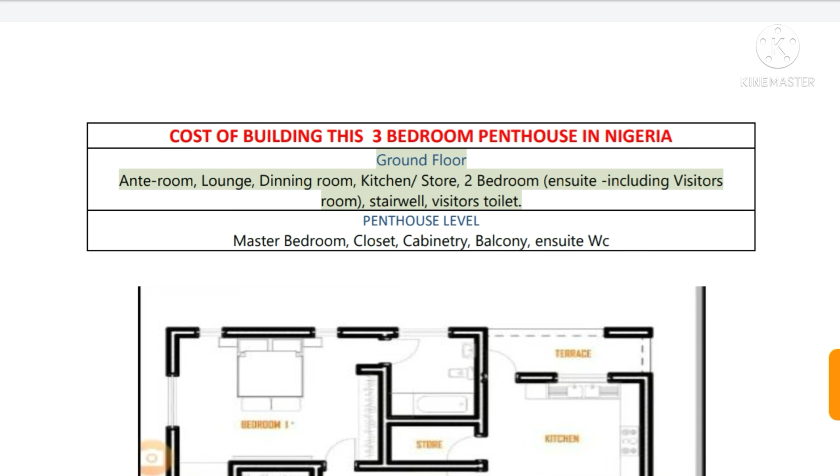As you can see, we have the features for this house, which is in the ground floor area. We have the ante room, the lounge, the dining room, the kitchen and store, a 2-bedroom ensuite room, the stairway, and the visitors toilet.

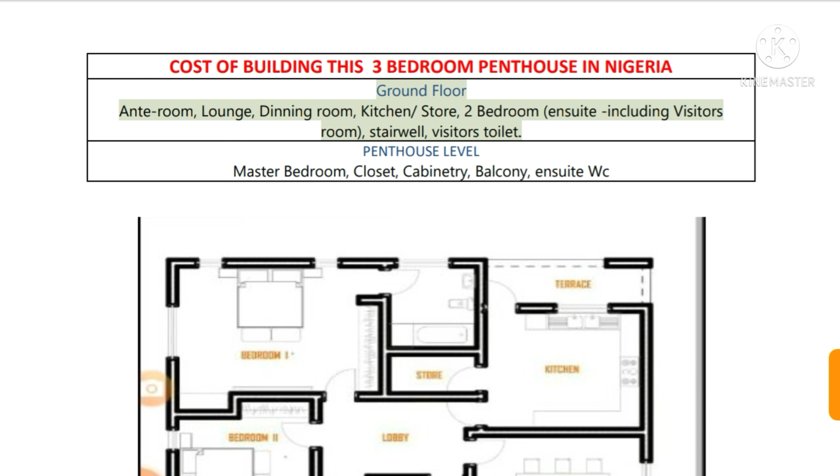We also have, in the penthouse level, the master bedroom, the closet, the cabinetry, the balcony, and the ensuite WC. Here is the building plan for the ground floor level.

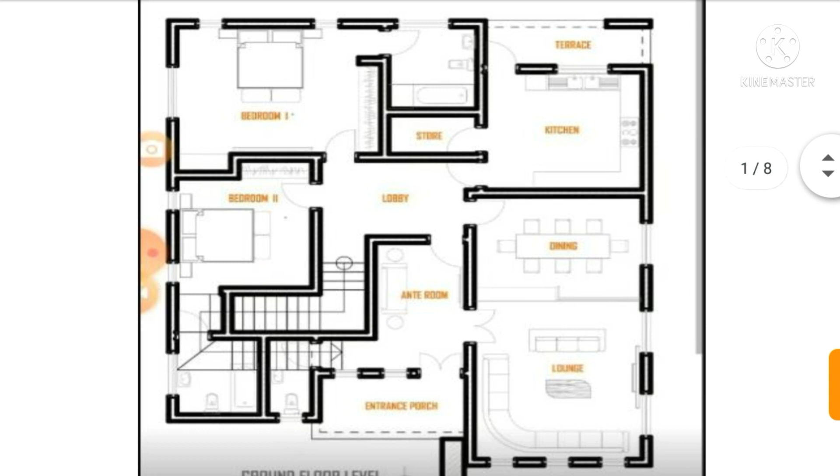As you can see, here is the building plan. I hope you can see it. We have the 2 bedrooms here, a lobby, an ante room, the kitchen, the dining, the lounge, and also the entrance. You can see the staircase here where it takes you to the penthouse level.

So going to the penthouse level, here's the penthouse level where you have the master bedroom, the closet, the toilet, the cabinetry, and also a balcony where you can sit and relax.

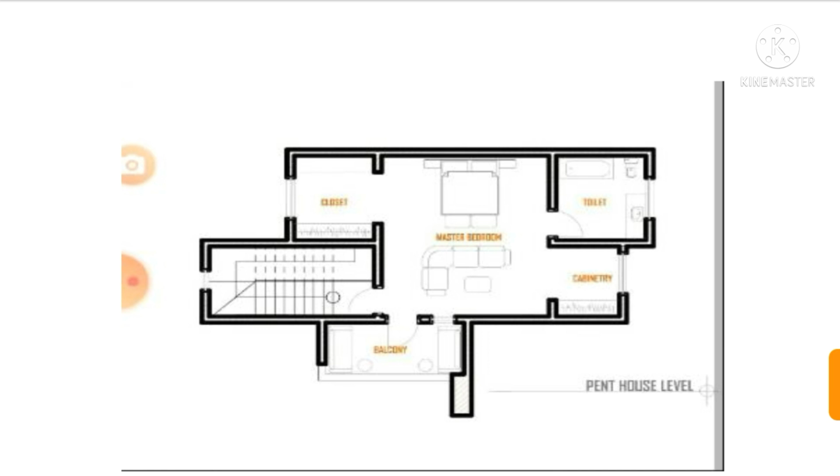So going to the cost of building a penthouse in 2022 in Nigeria, let's get started so we know the cost of materials. I'd like you to watch this video to the end so you find out the materials, because most of the prices have gone up and some prices may have been slashed, so you want to find out as we get started.

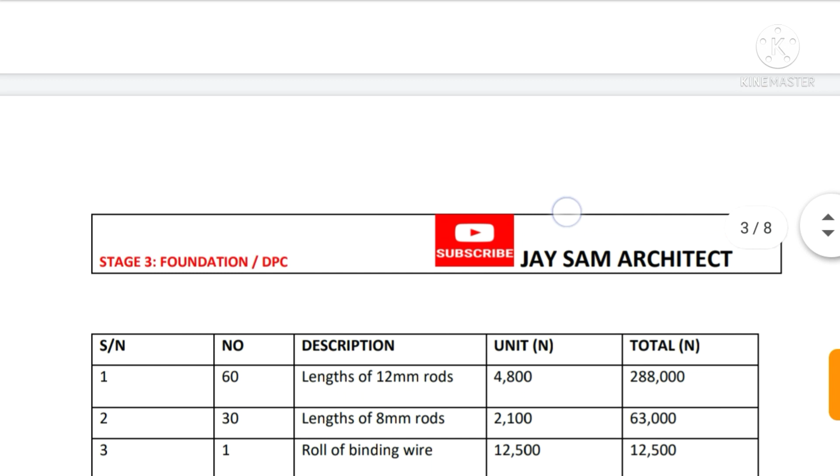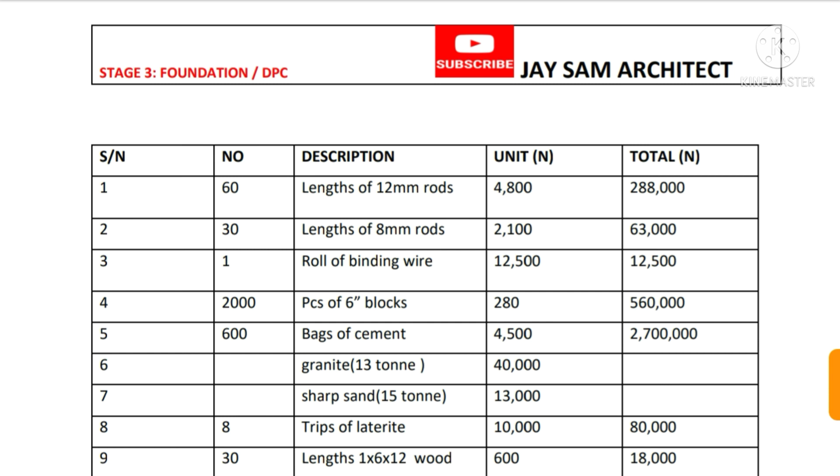So for the foundation and the DPC, we have 60 lengths of 12 rods at the price of 4,800, and 30 lengths of 8 rods at 2,100 naira.

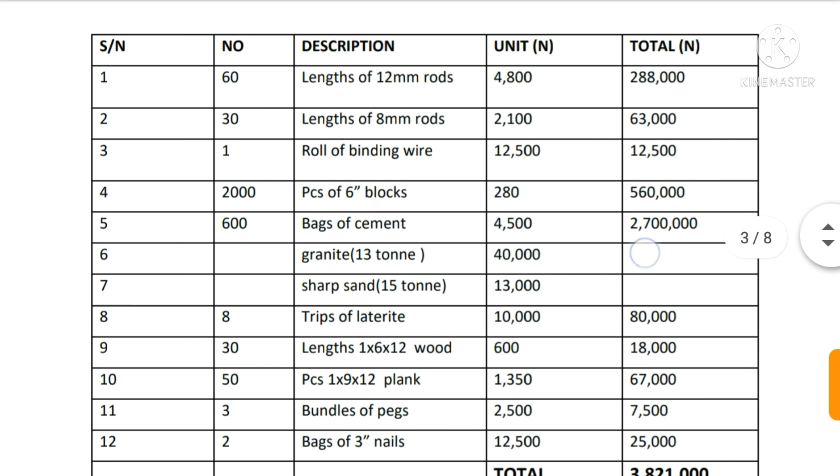We have 1 roll of binding wire at the price of 12,500. For a start, you need to get 2,000 pieces of blocks at the price range of 280 naira, and 600 bags of cement for a start, which will actually take you a bit far in this process.

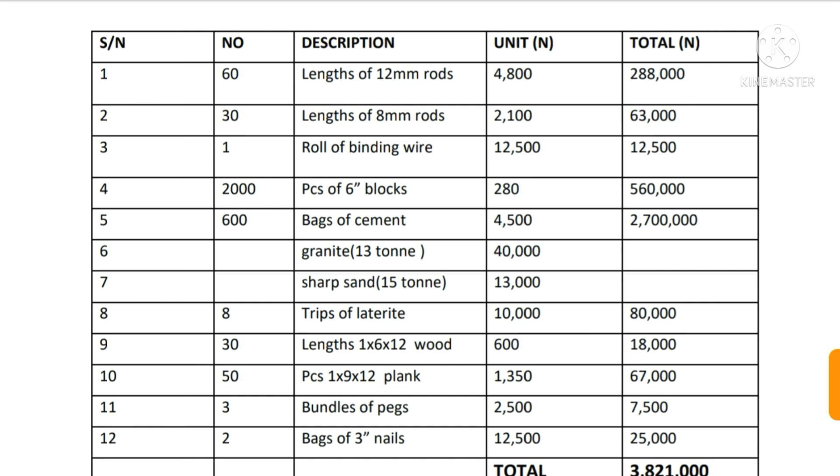So you get granite, 13 tons. You have the sharp sand, which is 15 tons of sharp sand. We have 8 trips of laterite.

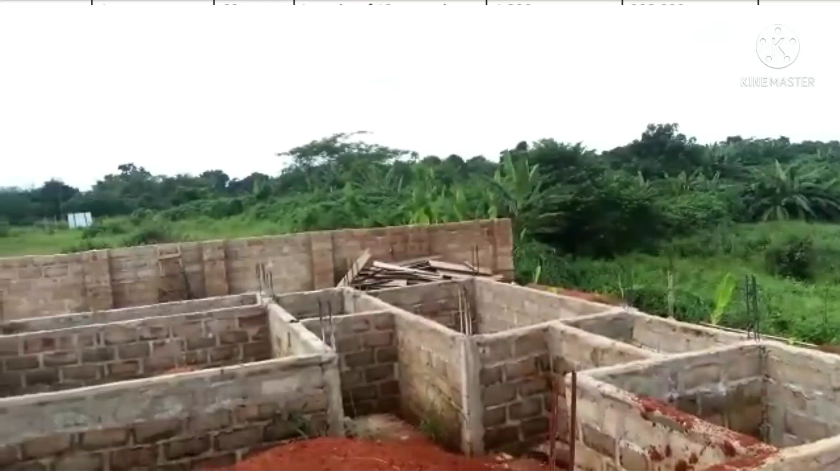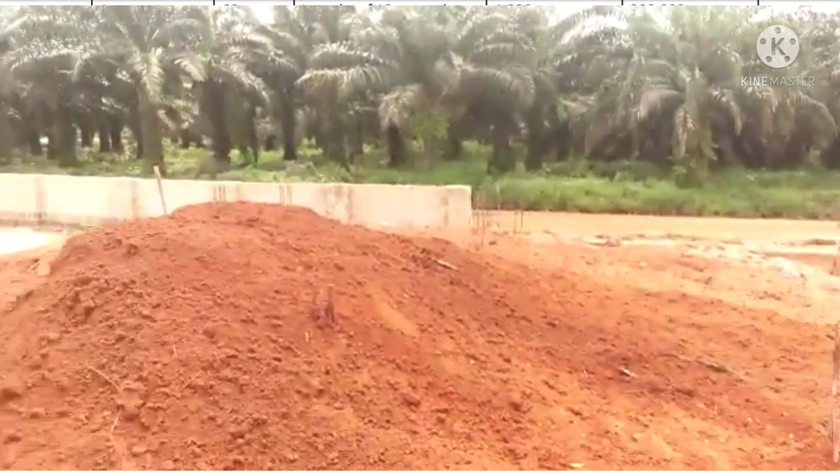So here I'll actually say, if you're getting a land, please make sure your land is actually flat, because if your land is not flat and you have started building, then when it reaches this stage of filling up the land, you actually spend more. If it's sloping, you need to fill it up with this laterite so it becomes level, and you may actually spend double the amount of money on top of the foundation you've already done. So this is advice I'll give you when trying to get land for your building.

So going forward, we have 30 lengths of wood, 50 pieces of planks. You can see the prices here — 50 pieces of plank is 1,350. You get your 3 bundles of pegs, which are used to mark the land so we can have your building plan.

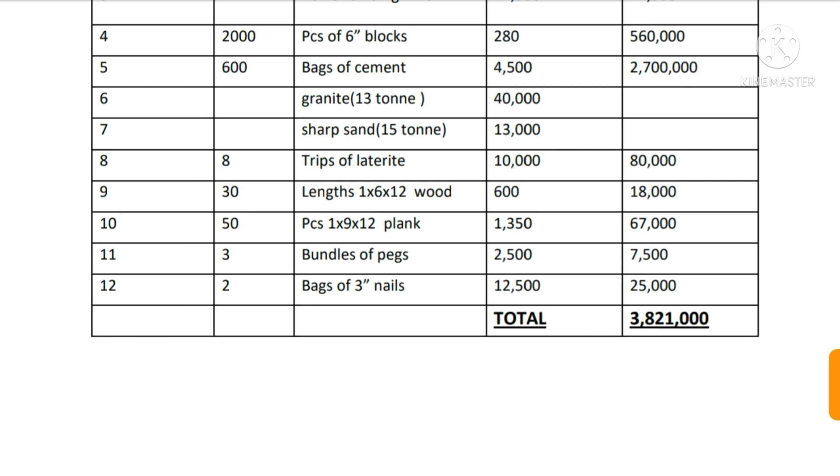So we have 2 bags of 3-inch nails at a price of 12,500. As you can see, here's the total, 3.8 million, for the foundation and DPC of this 3-bedroom penthouse.

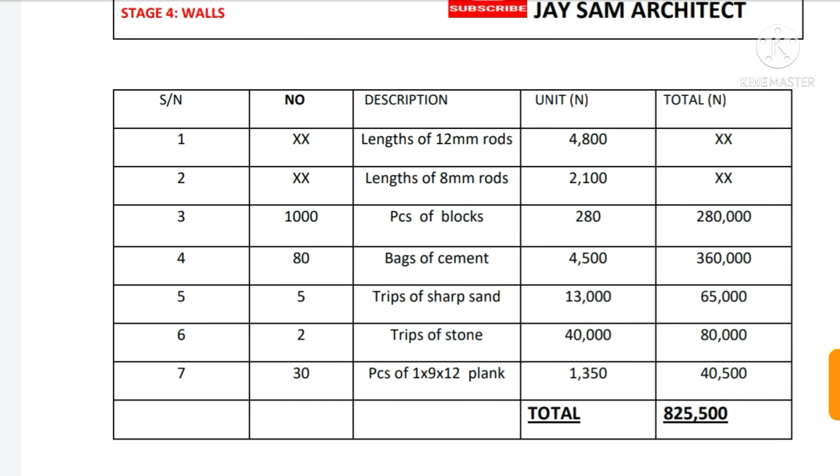So going forward, we have the walls. For the walls here, we have length of 12mm rods, length of 8mm rods. I included these extras here, so you may not need to get them if you've already gotten them from the first stage of your DPC and foundation. So you have 1,000 pieces of blocks extra to continue the building process.

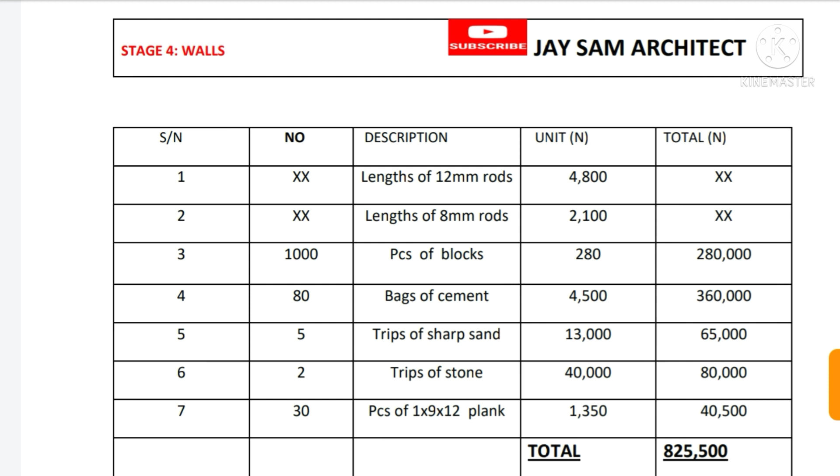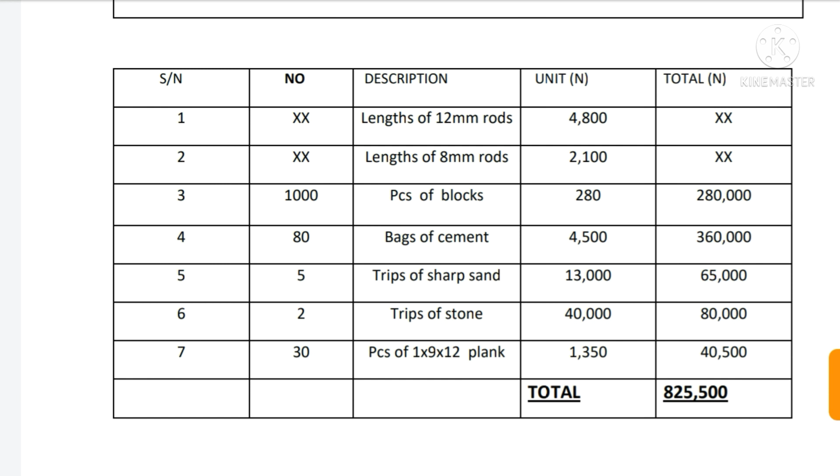So we have 80 bags of cement at 4,500 naira in my location here. We have 5 trips of sharp sand for 13,000 naira, 2 trips of stone for 40,000 naira, and 30 pieces of plank. So the total here is 825,500 naira for this.

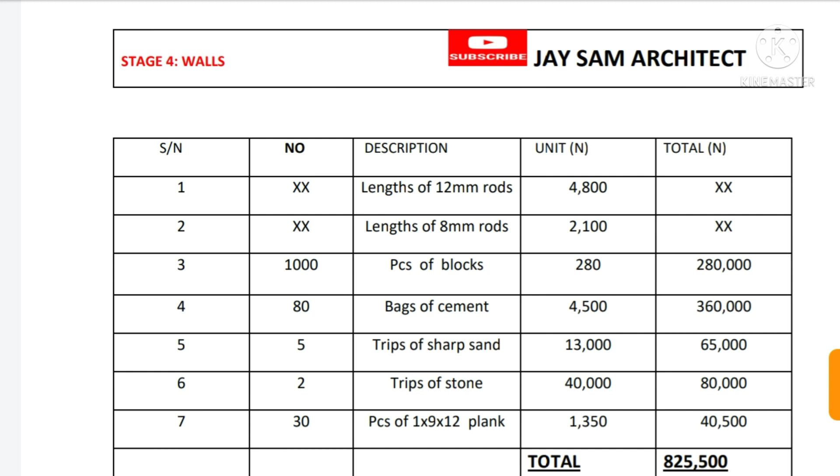Let's go into the decking, because it's a penthouse, so it's going to have a decking since there's a stair going up. So going forward, here is the decking plus the walls.

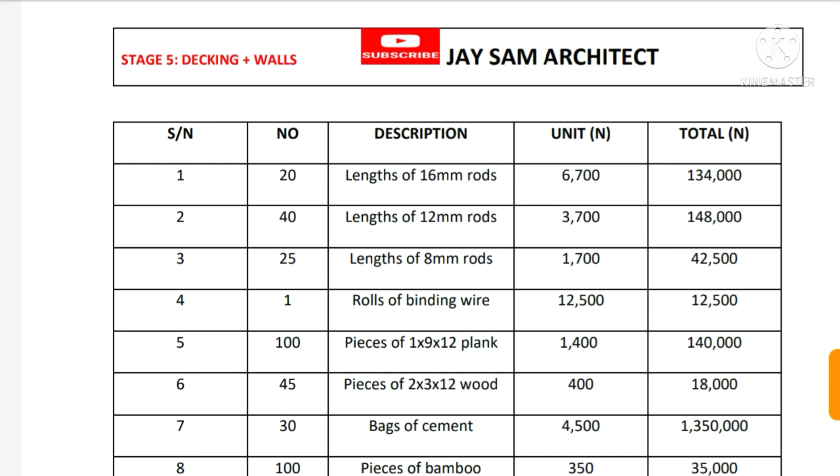So for here we have 20 lengths of 16 rods at 6,700. We have 40 lengths of 12 rods at 3,700. We have 25 lengths of 8 rods at 1,700. We have 1 roll of binding wire at this price, and 100 pieces of planks.

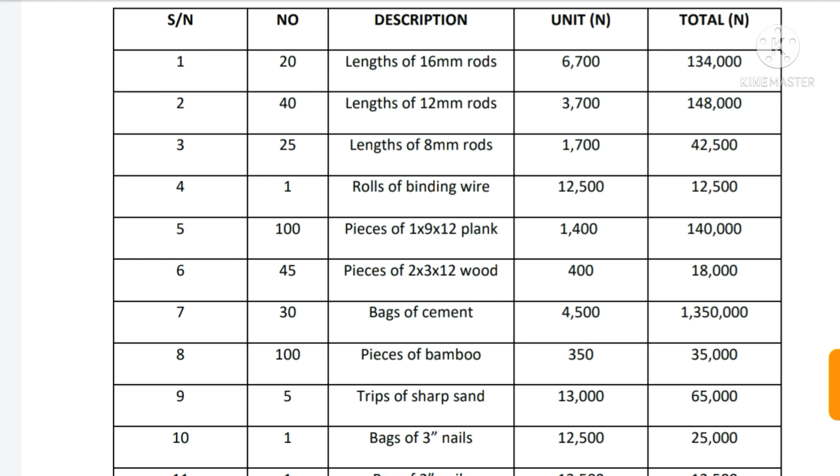You also have 45 pieces of wood, 30 bags of cement at the price of 4,500. Have 100 pieces of bamboo to help support the decking while doing it, and 5 trips of sharp sand for this also.

1 bag of 3-inch nails — you can check the price, 12,500. 1 bag of 2-inch nails, 2 trips of stone, 1,500 pieces of 9-inch blocks if you're using 9 inches or 6 inches. So for this project I decided to use 9-inch blocks.

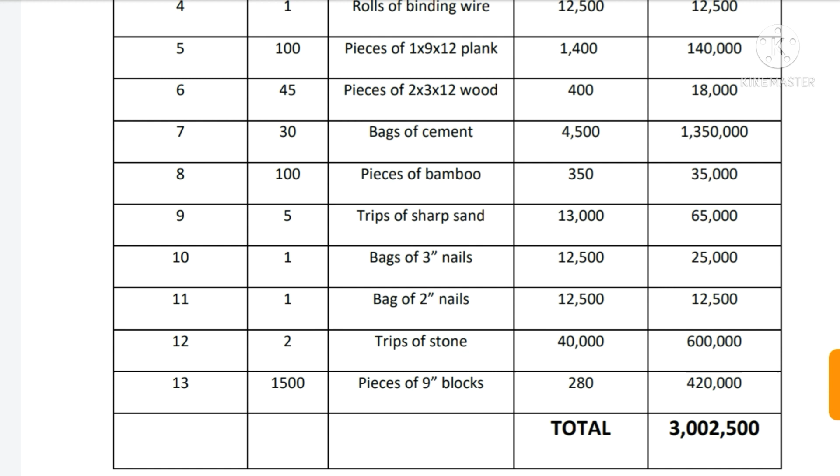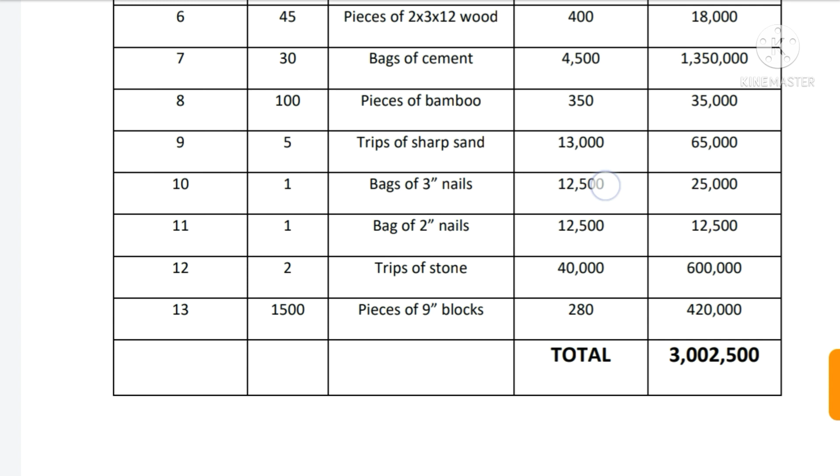Okay, so here is the total for this penthouse design, for the decking and the walls in the penthouse level.

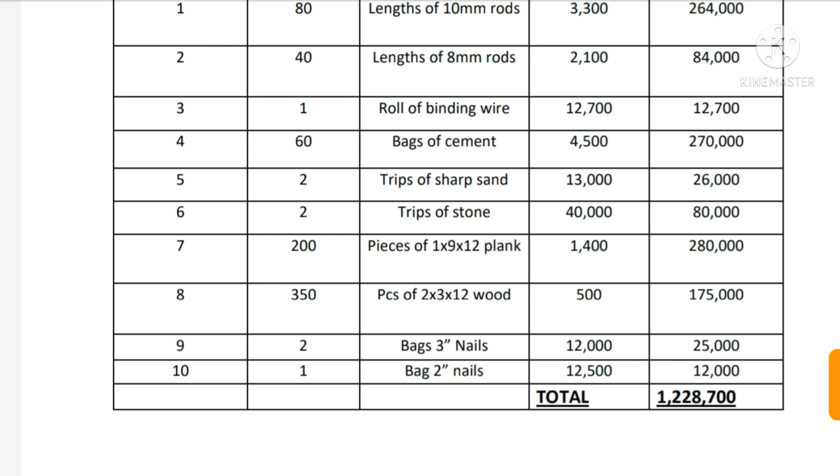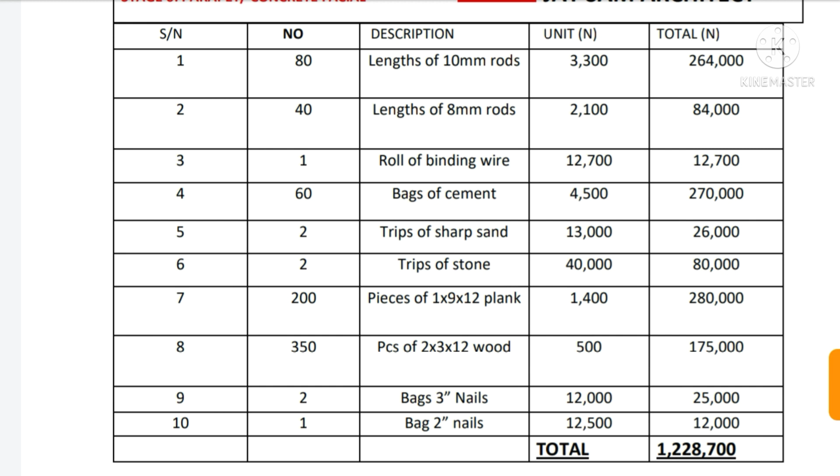200 pieces of plank, 350 pieces of wood, 2 bags of 3-inch nails, 1 bag of 2-inch nails. So you can see the prices here — we have the total here, which is 1.2 million.

So here is for the parapet and the concrete fascia.

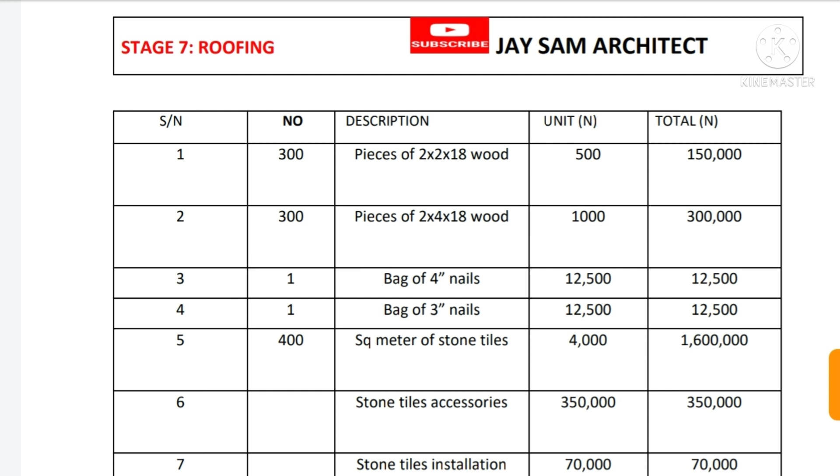So going forward for the roofing, we have 300 pieces of wood, 300 pieces of 2x4 wood at the price of 1,000 naira, one bag of 4-inch nails, one bag of 3-inch nails, and 400 square meters of stone tiles at 4,000 naira.

So you have the stone tiles accessory and the stone tiles installation. So for the total, we have 2.4 million naira for this.

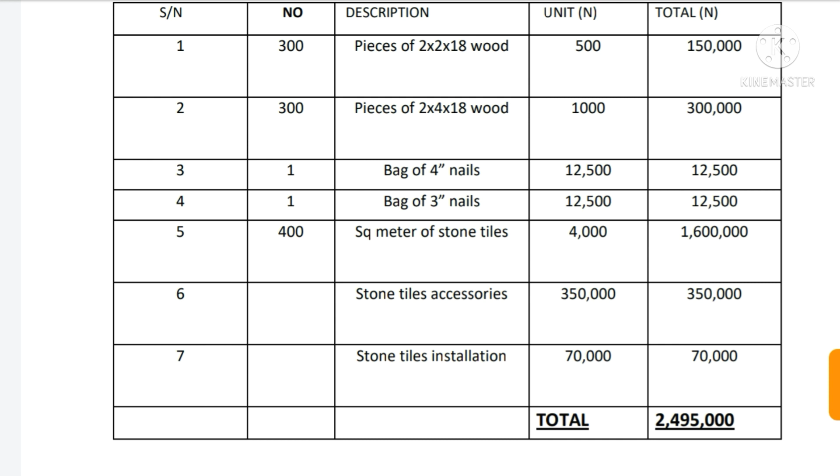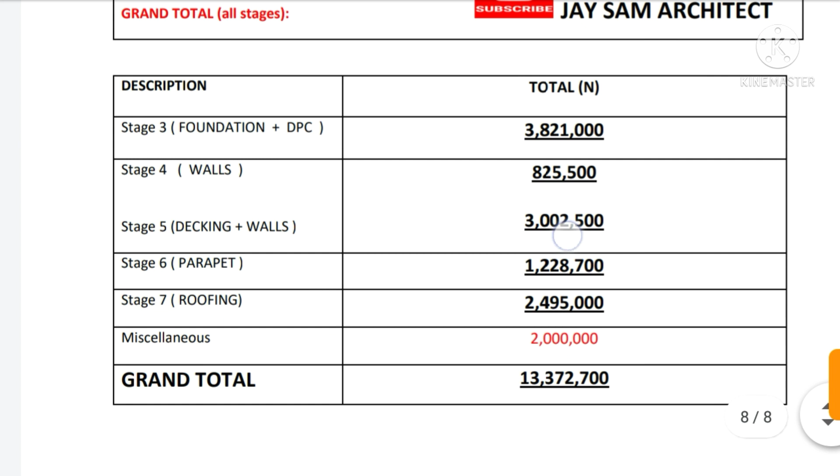So here's the grand total for this. You can see, after summing it up, I've added a miscellaneous amount here, which has taken the sum total to 13.3 million naira for this.